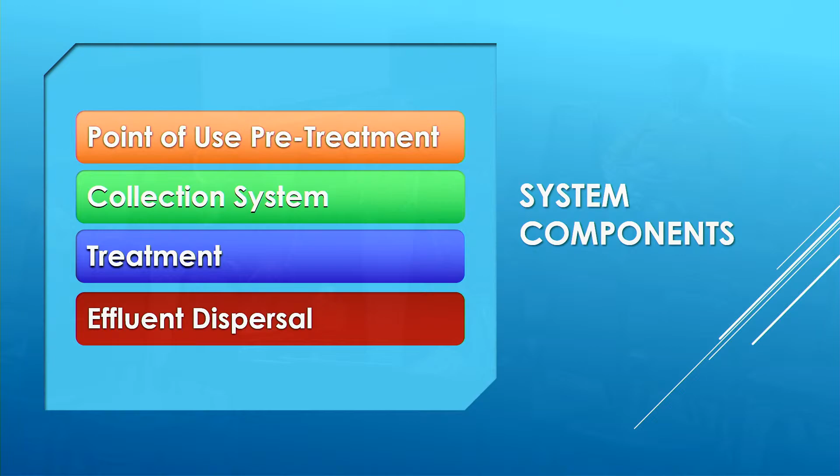So there are basically 4 system components, and the first 2 are very brief. They're very simple. This whole system is very simple. The first is the point of use pre-treatment. Then there's a collection system. Then there's the treatment, which is the biggest part of it. And the next to the largest is the effluent dispersal, which actually continues to work on the treated effluent.

Just a quick system overview. There's the point of use at the top, and I've color coded these - you'll see orange for those that are Tennessee fans. The point of use is where there's a house or a business, and there's usually some pre-treatment that goes on there in the form of a septic tank, or maybe a grease trap added if it's a business that uses grease.

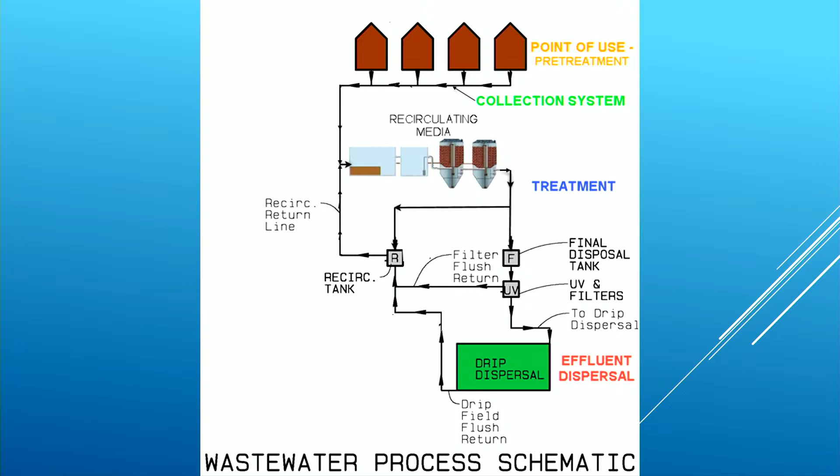And then there's the collection lines, which are usually a force main, but they can be a gravity line. And then there's the treatment, which is a recirculating media plant. And then the effluent dispersal, which is where the effluent goes down into the ground by way of drip tubes.

Using the NRCS Web Soil Survey, we evaluate the suitable soils that may be located on the property and quantify the usable area. We then balance the achievable lot yield with the required soils areas and overall treatment footprint. This process often involves some trial and error. The projected lot yield ultimately determines whether or not the development is economically feasible. When we are considering property acquisition and infrastructure cost, essentially it's a go, no go.

Sometimes the preliminary soils evaluation is taken a step further by getting soil scientists out on the property if it's questionable with the soils map. Those soils maps were developed for farming practices, so sometimes we want more assurance, or the developer requests it, and we do a preliminary walk through checking soils to make sure the NRCS soils maps are somewhere close. If the project is determined to be a go, a registered soil scientist performs a detailed soil mapping in accordance with TDEC's requirements.

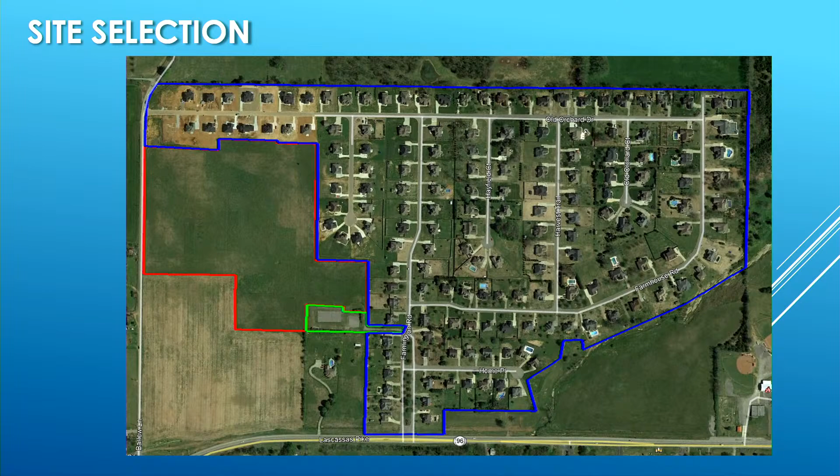So at the point of use, for a residential subdivision, the design flow is 300 gallons per day per lot. The pretreatment is a septic tank with a pump. If it's a commercial, industrial, or institutional user, the design flow has to be determined by the type of use proposed, and the pretreatment would be a septic tank and a grease trap. The septic tank has a pump in it, whether it's in the residential or commercial areas.

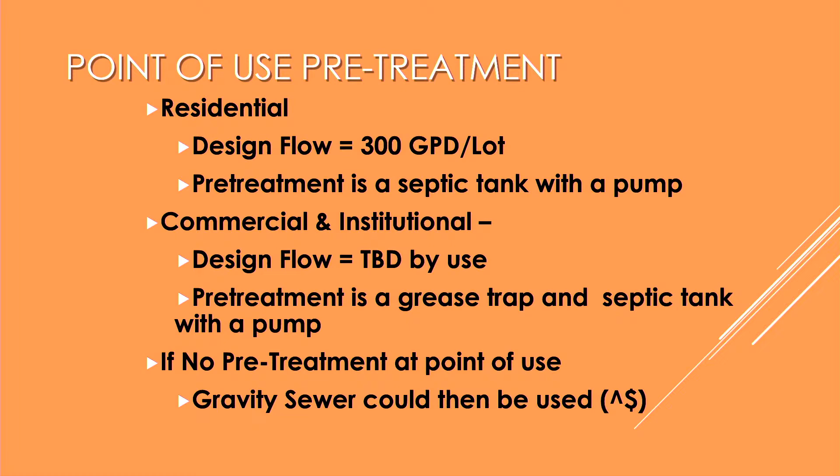If there's no pretreatment at the point of use, you'd have to use a gravity sewer to your treatment area, which is a lot more expensive. A force main is a lot less expensive. So with a septic tank, we're pumping the clarified wastewater into the collection system and on to the treatment area.

I got a slide out of order, and we'll come to it in just a minute with the wrong color, but I'm going to cover it right now anyway, and that is the pre-treatment. Let's see, I might be able to fast forward through there.

Oh, you're just getting where you can see? Okay.

And it's a watertight septic tank, which is very important—we don't need inflow from storm drainage or anything like that to increase the amount of effluent we're treating. So we want to make sure these are watertight, and there are a lot of companies that make those, so that's not an issue. We call them STEP systems because of the Septic Tank Effluent Pump—therefore STEP.

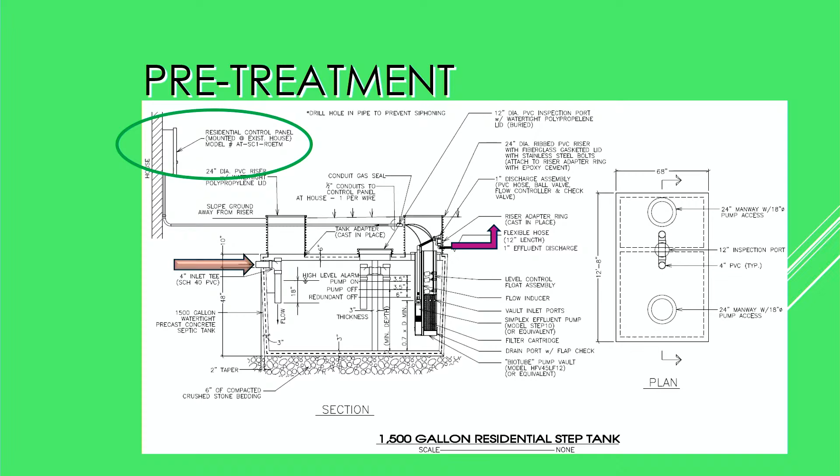I need to go back the other way now. Are there any questions about the point of use?

From a management perspective on those septic tanks, I know you mentioned there's an alarm that would go off if it lost power, meaning it would not be pumping. Is there technology now with Bluetooth capability so those can be monitored even from an off-site situation? Yeah, that's exactly what happens. Now, the utility company doesn't pay for the electricity, the user does. And that's also connected to let the utility company know when there's a problem, yes. Any other questions?

No aeration systems inside those tanks? No, sir, they're just a simple septic tank with a wall in it and a pump. So the solids stay in the tank, and the tank is owned by the utility company, with an easement around it for maintenance. If it were to have problems, you get in and service that. Those solids will eventually need to be pumped.

Yes, eventually, and if users are kind to their system, it could be a long time. I lived in a house when I first moved to Murfreesboro for 10 years, and I never had to have the tank pumped. So it's how kind you are to it that determines how long.

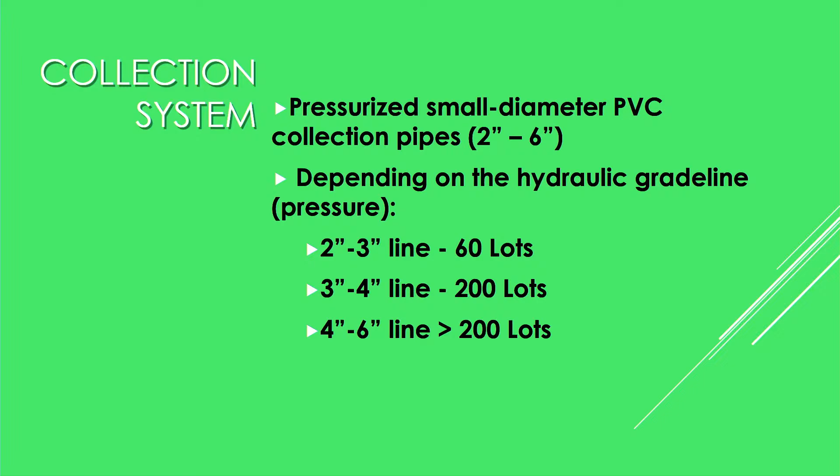And that is it on a collection system. They're very simple, not much to them. Any questions on a collection system?

Okay, now comes the meat of it, and that is the treatment plant design. We're going to talk about the design parameters. As mentioned earlier, the design flow is 300 gallons per day per house, and we have a recirculation rate that's typically 4 to 5 times through the system. One thing you don't want to do is run out of effluent and let your bugs die, so you keep some in there at all times to keep your bugs alive.

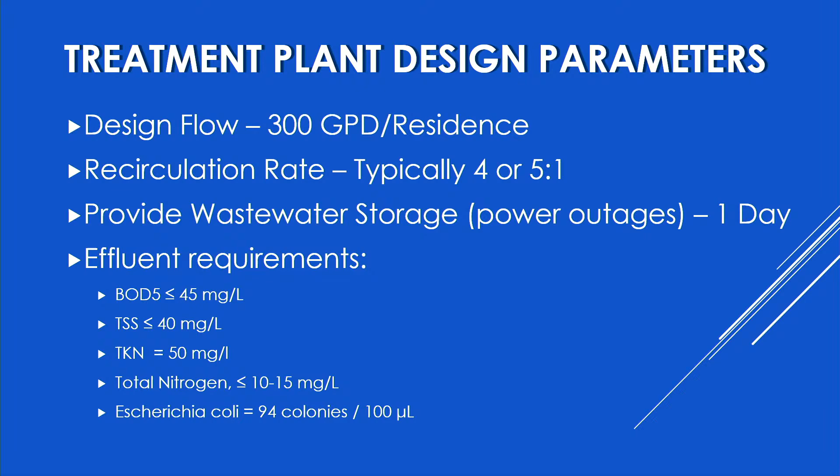We are required to provide storage in case of an outage. We have to provide one day's worth of storage. And we're going to talk a little bit about the treatment train.

Would you not have generator backup on this treatment facility? No, sir. In this day and age, we don't see as many outages as we did 20 years ago because of backfeed. But in that situation, it would have been in the septic tanks for days, not all at the treatment plant.

So what happens in 10 days on that septic tank side? Well, it's on the homeowner. I don't know, do you have any comments on that, Matt?

The concrete vaults are 1,800 gallon vaults. We say they're 1,500 gallons, but they're actually 1,800 because you've got some additional head on top. So right there you've got 5 to 6 days worth of storage, and then the piping system itself has storage capacity, and then the treatment facility—if we're doing, and I'm arbitrarily picking a number, 30,000 gallons of flow a day—we have to have 30,000 gallons worth of storage at the treatment facility.

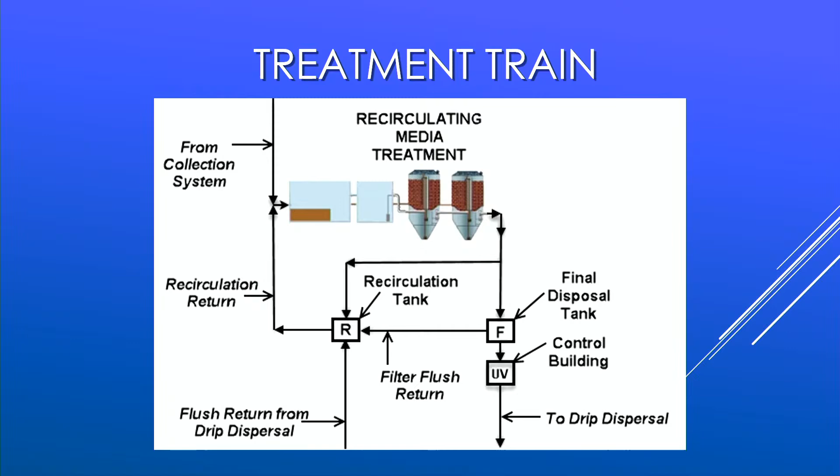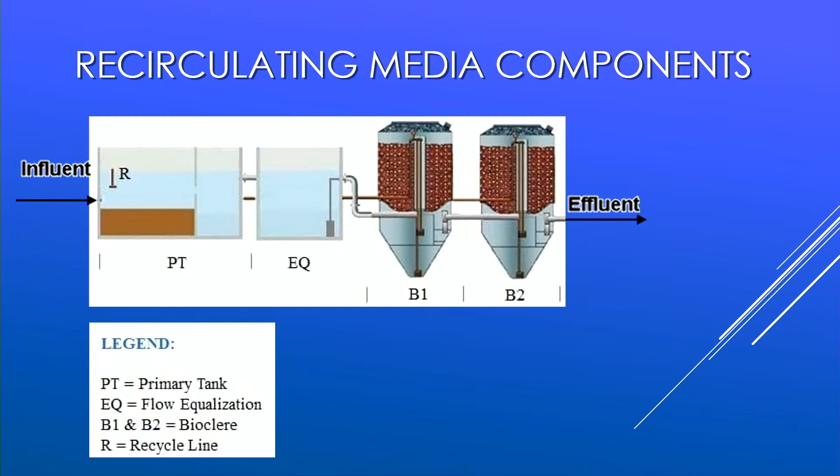The BioClere wastewater treatment technology is designed for a service life, typically around 50 years for the main structure. The system is built using durable materials like fiberglass and PVC. The BioClere units, our systems, are considered advanced, high-performance systems, and they're suitable for difficult sites or high-strength waste.

BioClere is often marketed as having a lower long-term operation and maintenance cost due to its design.

Each BioClere unit uses about 750 kilowatt hours per month. What you see there are two of them, and then the equalization uses about 250 kilowatt hours per month. Therefore, each train will use about 1,750 kilowatt hours per month. If you assumed 10 cents per kilowatt hour, that's about $175 per train per month. Typically, BioClere uses about a third of the energy of conventional systems that use blowers similar to activated sludge units.

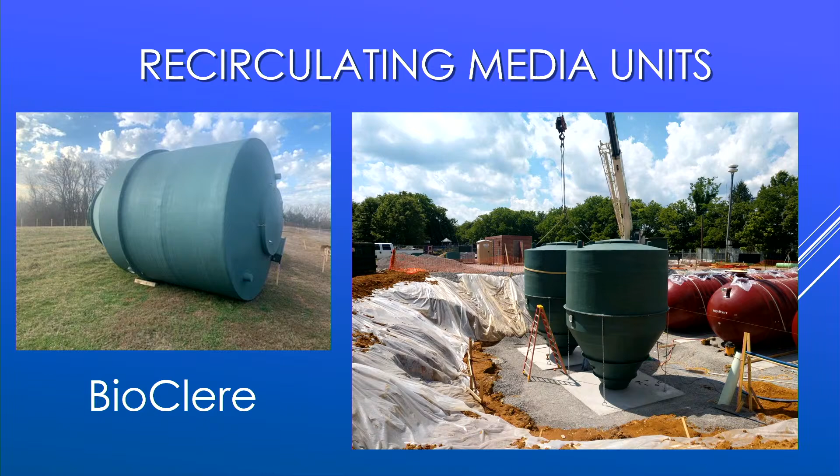There are several BioClere systems in Tennessee. We at Site Engineering Consultants have designed several in Murfreesboro, Thompson Station, Fairview, Memphis, and East Tennessee. They're used all over. I couldn't find an exhaustive list of them, but they're used quite a bit in Tennessee.

I mentioned the final disposal tank, and it's a concrete tank. Doesn't have to be, but that's our preference. There are various sizes depending on the flow that you're going to have.

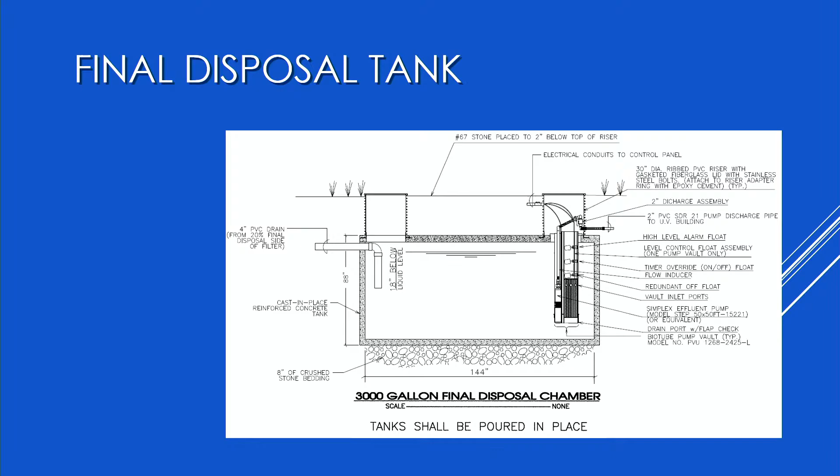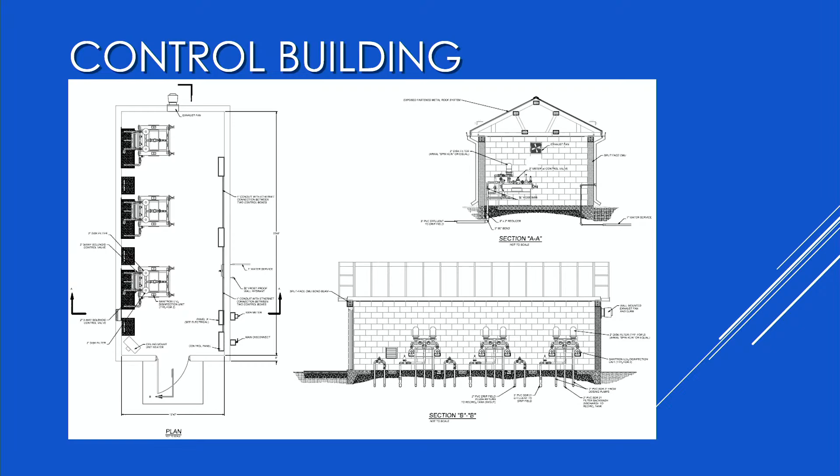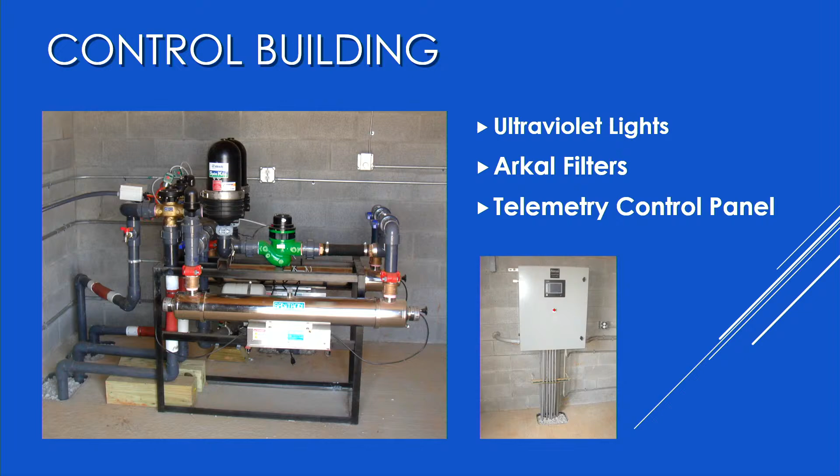Are there different sizes of them? That one right there - can it handle 100 houses? Yes, sir. There's a lot of different configurations, and you size them based on the flow. Yes, thank you for the question.

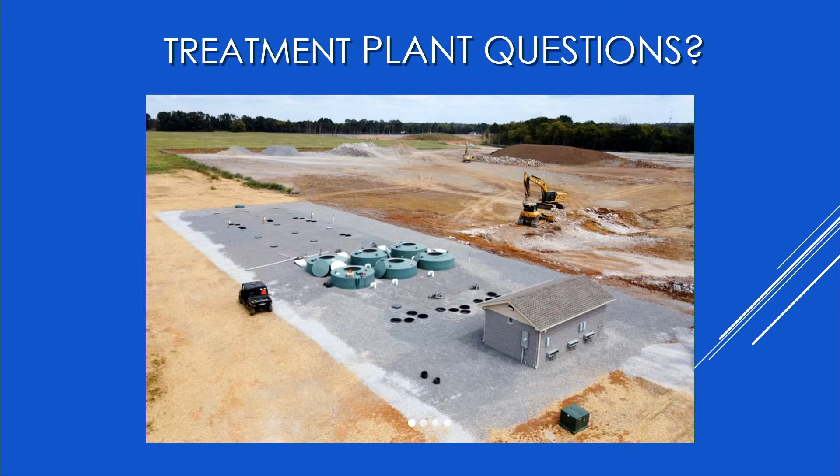What is the longevity of the UV lights? I'll let Matt talk about the UV light, because he's the one that handles the maintenance. The UV lights generally have a 3-year lifespan to them. We have had some that get electrical surge, and we'll have to go replace them. But generally, it's about a 3-year lifespan.

Any other questions on the treatment? Any particular configurations you have for the drip field, or any information about the drip field you could share with us? Yes, sir, I'll go into that right now. We call it land application or drip dispersal. The design flow, again, is 300 gallons per day per residence.

The land application rate - we'll discuss that in a minute. The soils mapping - we are required to do a high-intensity soils map with a 100-foot grid. In Williamson County, they require us to do a 50-foot grid. The usable soils are greater than or equal to 20 inches to the restrictive layer. We're required to do 2 test pits per soil type, and not every soil is good.

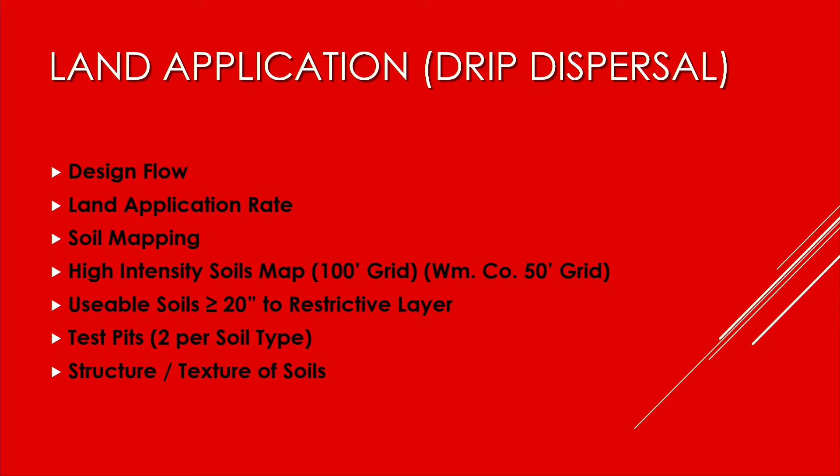The zones are controlled and monitored by telemetry at the control panel in the control room. The land application area requires soil mapping.

The land application flow rate - there's a flow rate, and we have to consider the soils and their ability to accept that. Some soils can take a higher flow rate than others. I'll just make a simple statement on that.

We use bioline drip lines with drip emitters, and those are spaced every 2 feet. Each emitter allows about 0.61 gallons per hour flow rate. So it's not flooding out of there, it's just a slow drip.

The state requires testing as effluent leaves the property, but it's easier to test at the filter building rather than catching water through soil - you don't know where it's going to migrate through the soil. So we test it in the control room, before it goes into the drip tubes.

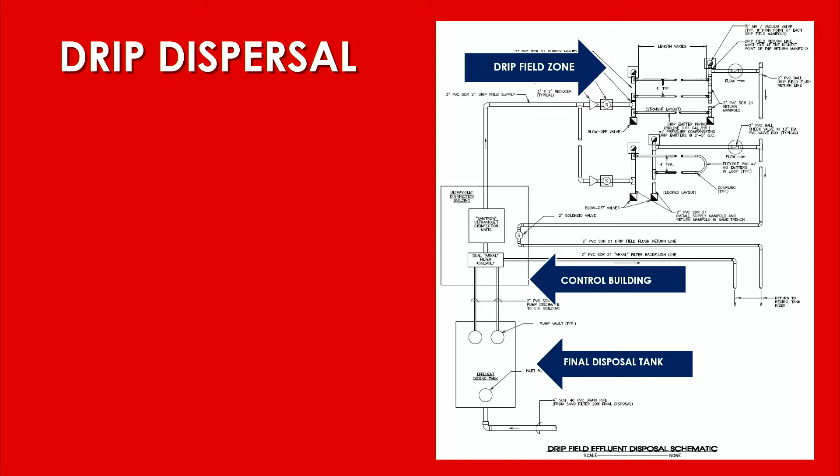Out in the drip field, the tubes are buried 7 to 8 inches below the surface, and the schematic shows the final disposal tank, the control building with the UV light and Arkal filter and the telemetry, and then the drip field zones, which I'll talk about now.

There's the drip tube - it's about as big as my little finger. You can see that drip emitter in a cutaway in the center top photo, and to the left you see that little hole - that's where the effluent drips out of the tube. These drip tubes are shown to be 8 inches under the surface.

Typically the drip tube is spaced at 2 foot, 4 foot, or 5 feet. There's no effect on the drip field size. We've used 5-foot spacings forever and haven't had an issue, unless somebody has done something to the soils to make them not usable, or after they were mapped, somebody altered the soils - but otherwise we've had no problems with a 5-foot spacing.

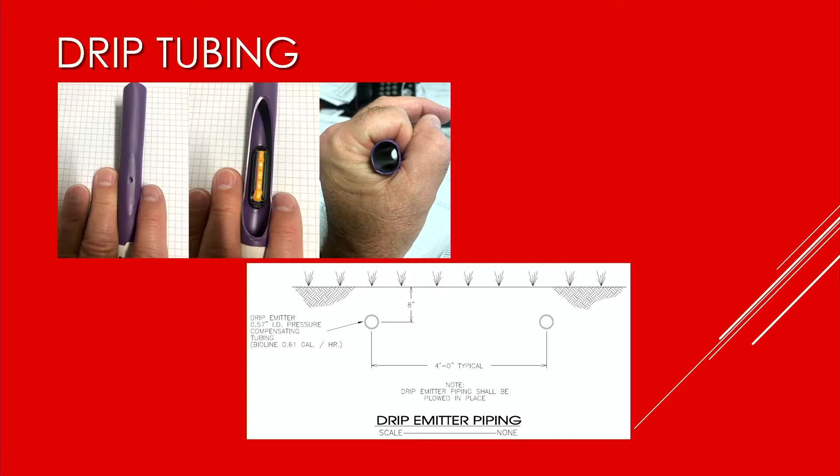The maximum length of a half-inch drip tube - we try to keep that at 400 feet, plus or minus, because of pressure losses if you go much farther. Typically you should have a maximum of 16 to 18 drip tubes per zone.

This shows a subdivision with drip fields in there. I had a picture of it without overlays, but what you see in green are the drip tubes themselves. We draw each one of those, and they're spaced at 5 feet apart.

The gray lines you see are the mapped soils from a soil scientist, and we determine where there are good soils and soils that aren't usable. Where it goes through soils that aren't usable, you have to put a tight line through there so there's no dripping - no effluent released through those areas.

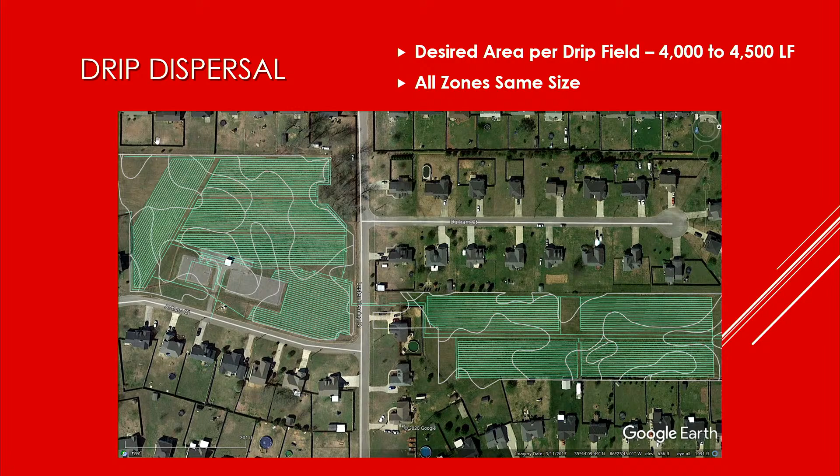Again, we fence those areas to keep people off of them from destroying it. You wouldn't want someone out there in a four-wheeler spinning their tires and digging up a drip tube.

How do you control the foliage that's growing out there? I'll get to that in just a minute. Thank you for the question.

So for the land application drip dispersal, we have to look at the required or allowable loading rates on those soils. A soil scientist determines those, and TDEC and other authorities have their own acceptable loading rates, but detailed studies may dictate different rates than the maximum.

Our preference is to set the maximum loading rate, even though some soils may allow 0.25 gallons per day per square foot as TDEC allows. We don't like to go that high - we use 0.2 gallons per day per square foot for well-drained soils.

I noticed you used consolidated utility there - I noticed that you listed consolidated utility there at 0.15. Yes.

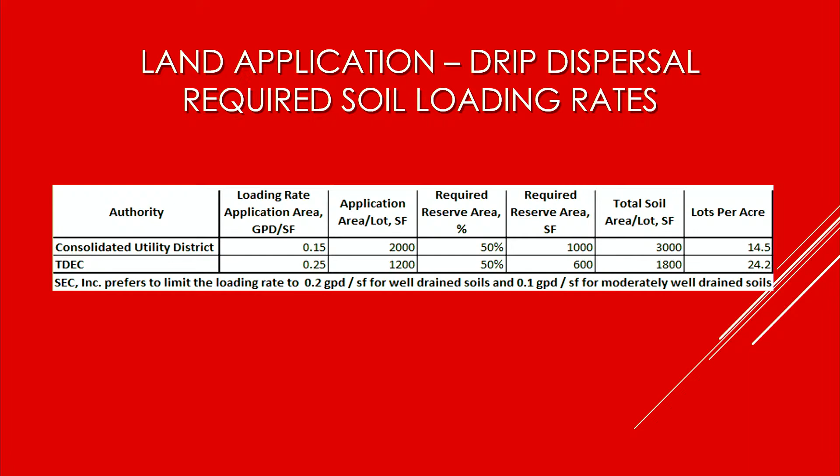So on that question, one of the biggest dilemmas we have is deciding what to recommend to the planning commission in terms of regulations. There's an obvious difference between TDEC, which one could classify as the minimum standard, and what Consolidated Utility District uses as standards for the systems they manage. What are your standards in that regard?

You mentioned .2. Yes, sir, that's your company's standard. Yes, we don't go more than .2 gallons per day per square foot.

Let me interject some real quick. On the loading rate, you have well-drained soils, and that's what this is talking about. Well-drained soils, TDEC's gonna let you have a .25, we go with a .2. Moderately well-drained soils, we're going to go with a .1. It's a very linear equation, so if you have a bunch of moderately well-drained soils, you're going to need twice as much soil as you would if you had well-drained soils. So the standard really is .2 for well-drained soils and .1 for moderately well-drained soils.

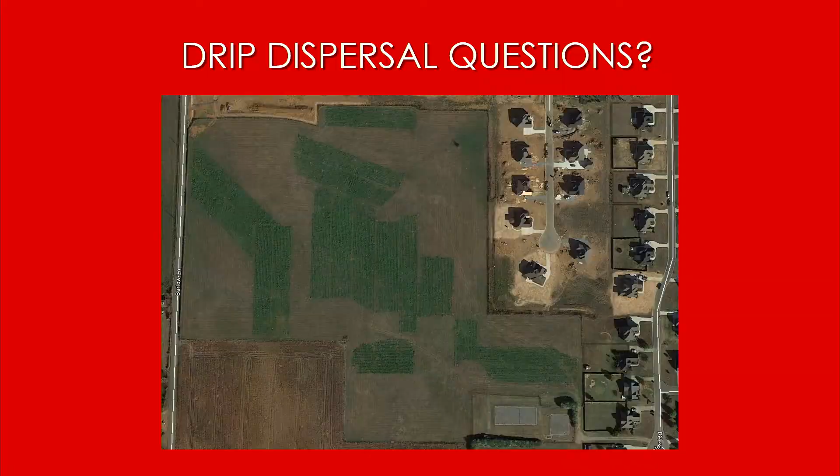Thank you, Mark. Again, I'm Matt Nix with Edge Wastewater. I do want to clarify one thing I said earlier. After you asked me the question, I texted operations, and they said that we're replacing the UV lights. 50% of them get replaced within 12 to 15 months, and the other 50% are replaced between 24 and 36 months. A lot of it depends on usage.

So how do you know when it's time to replace one? They go out and look at the UV light itself, the bulb. Some of them we can clean off, some you can't. So you have periodic inspections? Oh yes, sir. How often do you inspect? Twice a month, every 14 days. And then we have the rest of it set up on telemetry so we can monitor the system remotely.

Appreciate Mark's comments about the system and how it works. For you guys, at that point you decide you're going to go with the system. Then the question becomes, what do you do with it? How do you manage it? How do you operate it? Who operates it? There are several different models out there, and I'm happy to talk about any of them, or the bigger ones.

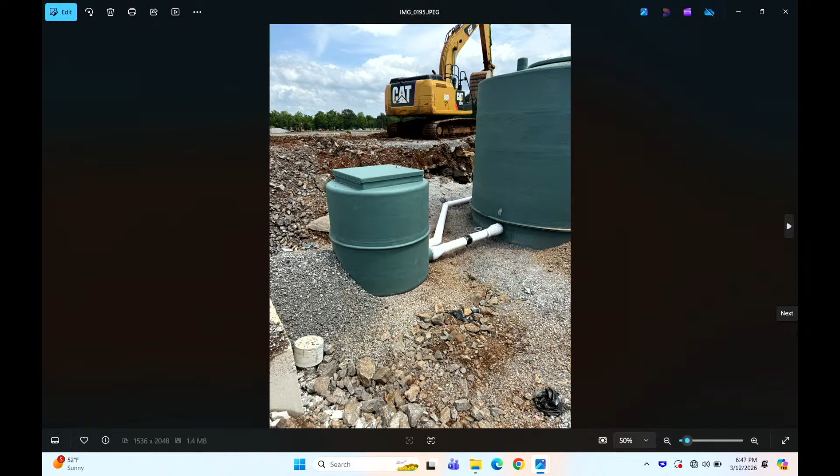This right here was the Uncle Nearest out on 231. These were 4 bioclears. I wanted you to see this because a while ago, all you saw was the top 2 or 3 feet of these bioclears, because that's all you see. But these right here are 22 feet deep, and there's blasting involved in pretty much all of these systems. We have to blast these holes, Rutherford County, Bedford County, you're not going to dig a hole 22 feet deep in this area. So normally, and in this case, water was kind of an issue, groundwater, so we actually pulled the tanks up out of the ground a little higher, and I will show you what we did.

This was how the splitter hooks up to these units. Those 4 units actually worked in series in 2 pairs. There was one bioclear that was higher than the next, and they worked in series down to the dose tank, and I will kind of work through this. That's for a reason, and once again that is an engineering reason, I don't dictate that.

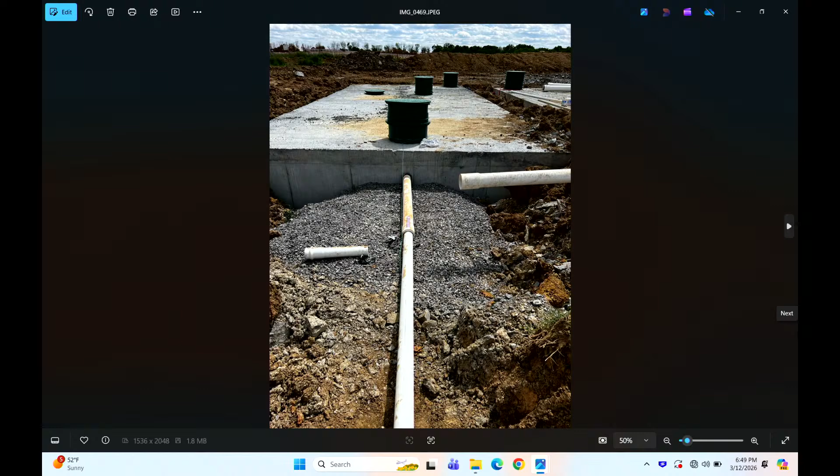This right here is the massive, it's a 25,000 gallon concrete tank that they used to catch, as a holding tank, that was pumped into the EQ tank, that pumped into the splitter down to the bioclears. It's kind of like he said, it's not a complicated system, it's just pretty massive if there's a lot to it. This is a commercial application and not a residential, but we are actually in the process of bidding one in Spring Hill that's going to have almost 800 houses, so it's a massive system.

And I will say that learning from technology, SEC is actually drawing the plans for these. They are starting, this will be the first one we will have ever done this on, but they are using drawdown drains and curtain drains around the drip line to make sure they keep all the excess water away from the zone area so that the dirt is only handling what's coming from the plant. So they're learning as they go, the technology is really catching up.

If we had no rules and regulations, how did that get approved in Bedford County? I'm sorry, if we had no rules or regulations, how did that get approved in Bedford County? It's a commercial application, I believe that falls under TDEC, but I'm not sure, that's a question for somebody that knows.

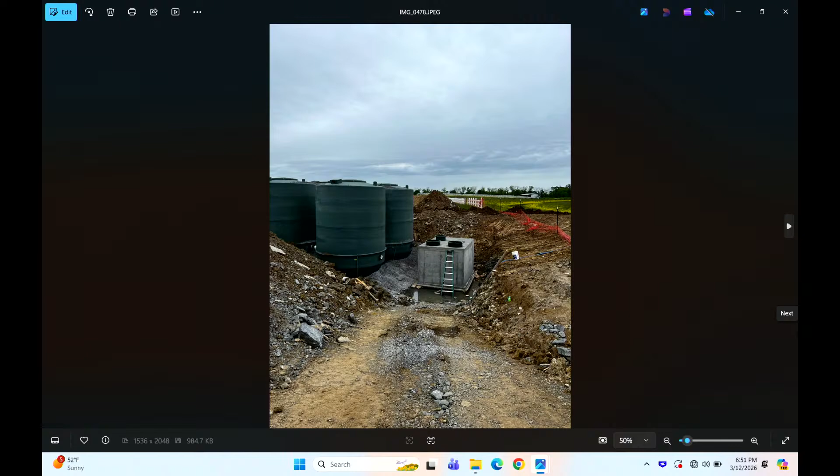This is the dose tank, the bioclears hooked up to the dose tank. We use mechanical joint fittings in this instance to make sure it's more durable.

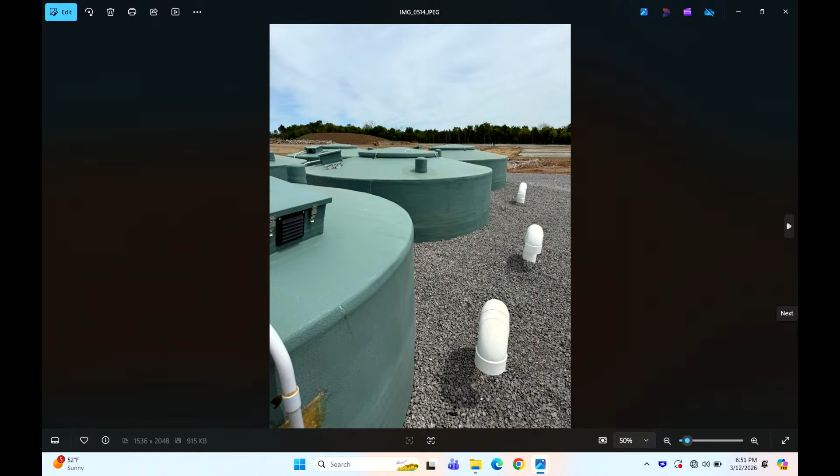These pictures are not in order, I apologize for that. This is actually Greystone, the picture Mr. Lee showed you earlier, the aerial view of the big system with the 6 tanks and the big gravel area—that's these right here. We actually installed this system, and they did an aerial view before the fencing and any of it was finished.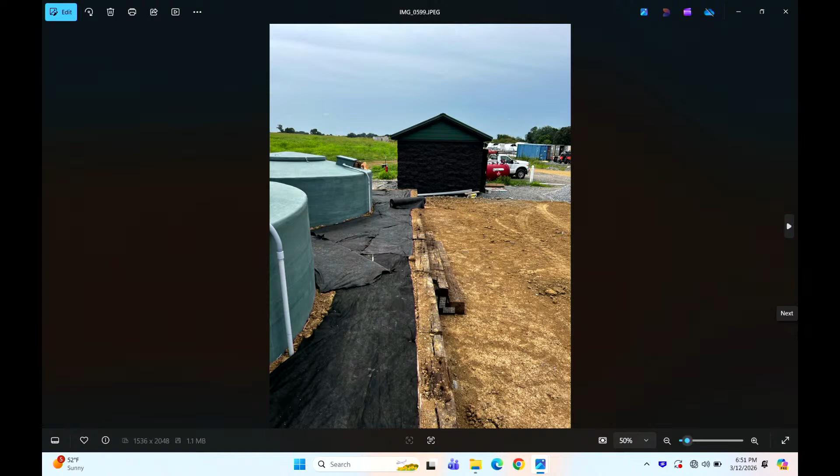This is back to Uncle Nearest. As you can see, we pulled the bioclears out of the ground some. Aqua Point doesn't want you to go higher than 3 foot out of the ground because of a maintenance issue. Those little green boxes on top have electrical connections that need to be accessed—you see the big access panel on top. So for maintenance, they don't want you to bring it out more than 3 foot. Obviously in Bedford County or Rutherford County, you want to bring it up as high as possible to get out of the rock.

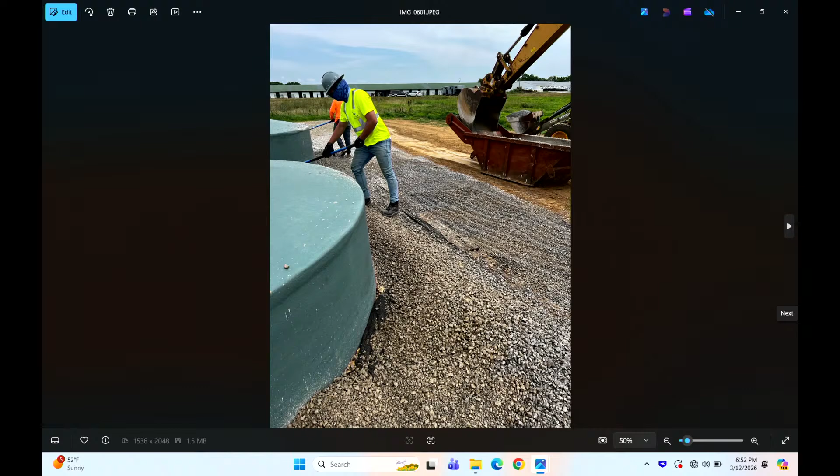So what we did is use cross ties to border these and build up around them, and I'll show you this. We gravelled everything—once again, we don't leave any dirt or grass, we gravel everything. That's a long way picture of what it looks like now, and that's a bit more close up of the control building and the bioclears. Like I said, we box them in with the cross ties just to make it look better and more accessible for maintenance.

Coming from more of a maintenance side and an installer side, I look out for the guys that have to maintain these things. I don't want to put anybody in a bind like that. So if it costs us a little more money, we're going to do what's right.

This is just more pictures of the gravelled area. They did not make us fence in this area. The drip line out at Uncle Nearest isn't fenced in because it has UV light filtration in the control building—if you have UV filtration, you don't have to fence in the drip line. I would encourage you to though. Before we got done with this, they were riding horses out on the drip line area, so we had a big ordeal trying to keep them off of it.

There's a little better picture of us boxing those in and graveling everything. We even put some steps there for maintenance purposes.

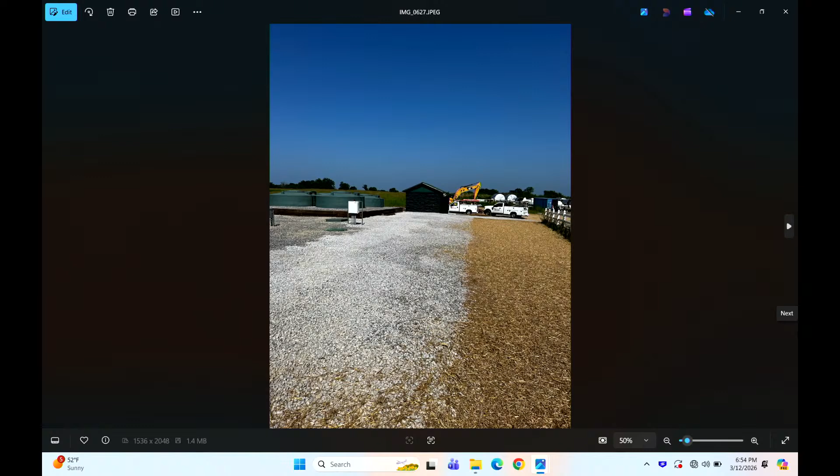When you have to get into the top of the tank to replace something, how many feet of clearance do you need above that? If you open that big round circle on top of the BioClear, the media is within arm's length, probably 18 inches.

Have you seen any of these where they actually put a roof over it to protect it from UV, to keep from breaking down the tanks? I mean, you could, because obviously fiberglass, PVC, anything like that is going to break down with sunlight over time. But Aquapoint can probably attest they have these in the ground for probably 30 years and haven't had a bit of trouble out of the hull. So I don't know, if you wanted it to last 100 years, then yes, you might do that, but that would be a question for them.

Any other questions for them?

I don't really know exactly what to tell you other than show you kind of what we use to install these, some pictures of us actually installing. I was trying to get to... here we go.

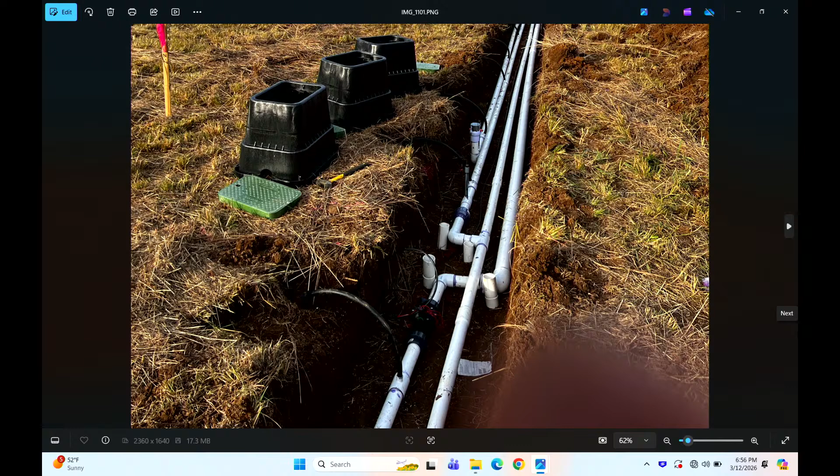This is the drip line he was referring to. Off to the left where those boxes are sitting is where the Netafim drip line pipe are running. If you see the little black pipe coming out of the ground going down to the white PVC, that's the black tubing we use to connect the drip line to the actual manifolds.

The manifold closest to the ditch is our supply. We always put them first, that way it's more uniform. Everybody knows if they dig it up, this line is the supply manifold. This is a return manifold.

The 3-inch pipe is the actual supply itself. That's coming from the building, coming out to the drip line. The little black pipe at the bottom, there's a black blob right there - that is a solenoid.

What happens is when the building kicks on, water will go - effluent, yes sir, right there. Effluent will go through that 3-inch pipe to every zone, but the computer will tell it which zones to cut on. So you're only dosing certain areas of that field at a time.

You're not dosing the complete field. So we basically construct all this. You have blow-offs and check valves to make sure nothing backs up into the back of that system. This system actually was what he was talking about a while ago. The maximum length is 400 feet.

These lines were less than 200 feet, so we looped them on the other end. So your supply came in right here, went down, came back, and then went into the return. So you have different configurations based on how your drip line lays out, if that makes sense. But it's a real simple system - water comes on from the building, comes out to the system, computer tells it which one to cut on, and it's all simple PVC piping.

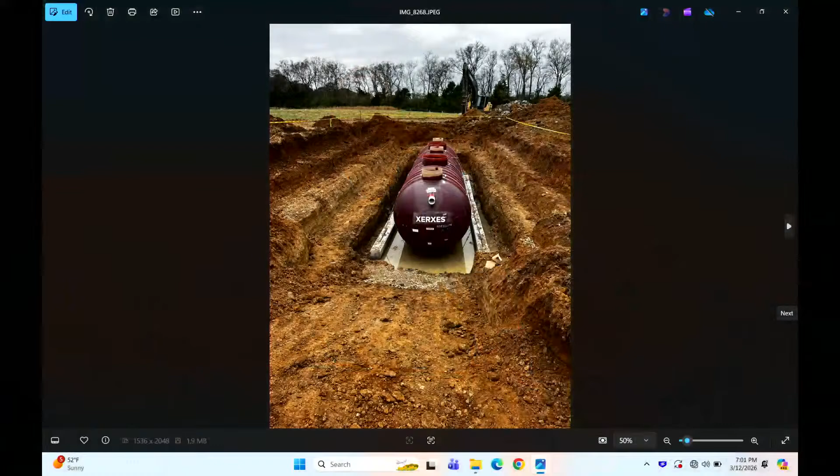This right here is Xerxes tank that he was talking about earlier. This was College Grove. This is actually a combination tank of the EQ tank and the recirc tank. I know that doesn't mean anything to you guys, but these are 2 tanks in one because this was a small system.

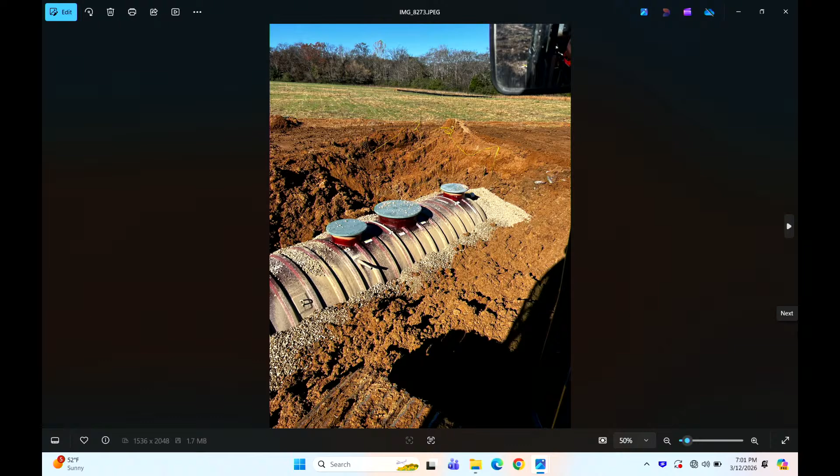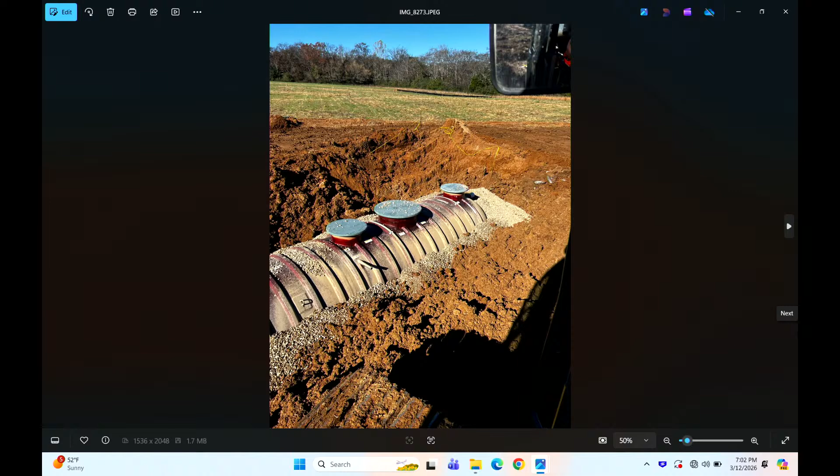This is covered up. Everything is gravelled. We don't want any dirt touching anything other than the gravel we put around the system. We gravel all the way to the bottom of all the piping. Some people found out the hard way backfilling with dirt. You don't want to do that because dirt settles and these pipes were snapping off. So we gravel everything up under it, and actually we even gravel more because it's just cheap insurance.

What do you use, half-inch chips? Yes, sir. That or 3/4, 57s.

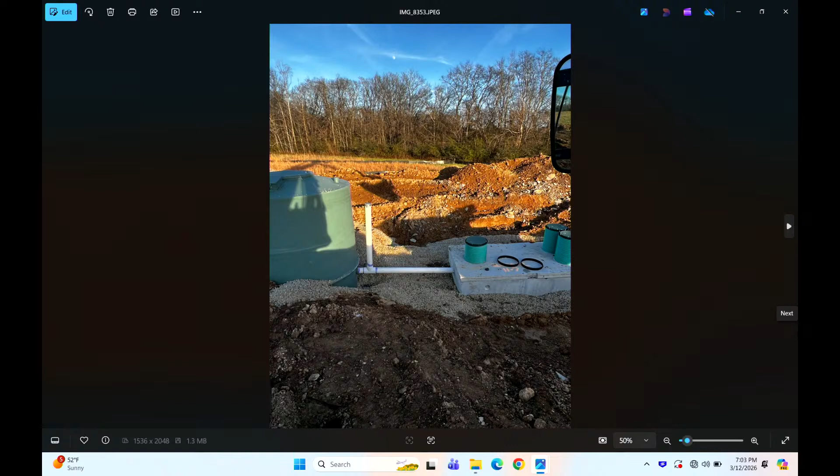This is just the pipe hookups, PVC from the EQ dose tank to the BioClear. There's one going to the dose tank. If you see that pipe sticking up, these systems are always vented on the outside so that any gases can get out, just to make sure you don't have any issues with that.

That right there is the line going back to the recirc tank. The BioClear doing its job just like any filter, the sand filter, EcoPod, any of them, they're throwing water up on top and it leaches down through the filtration, and that's how you filter the water. Then that water goes out to the dose tank and gets pumped to the drip line. Anything that doesn't make it out to the drip line gets pumped back to the recirc tank, and the filtration process starts all over again. So it's just extra filtering.

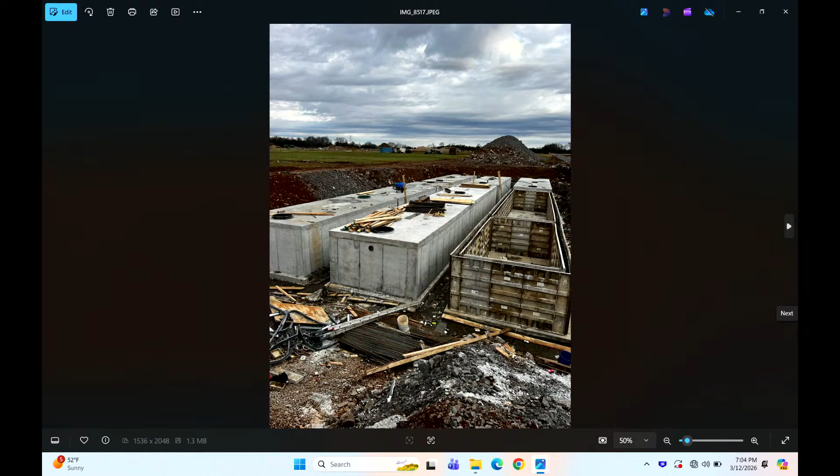This right here, the system he showed you at Greystone in the aerial view, these were the tanks that we built. We used the concrete tanks and not the Xerxes tanks. The 3 that are farthest away are 15,000 gallon tanks, and they are the EQ tanks. These 3 up close are 25,000 gallon recirc tanks.

I wanted to show you this one. That kind of shows how these tanks are built with the forms up. The last one wasn't poured, and they are 8 to 10 inches thick, depending on the rebar specification.

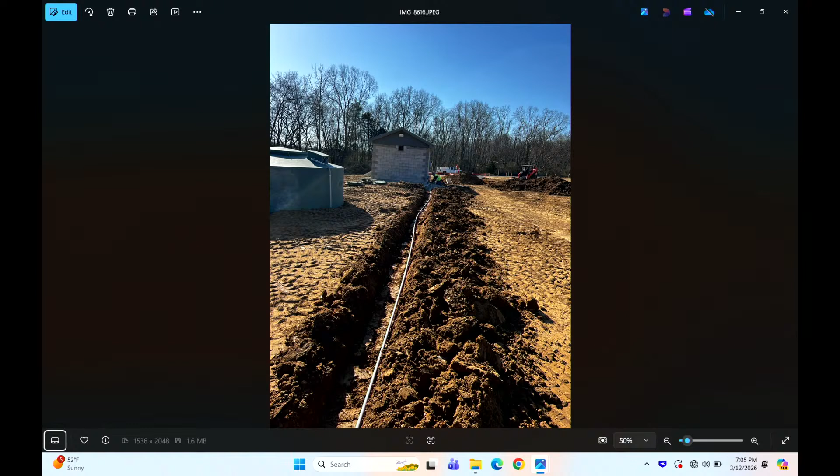So, any questions anybody have on anything? It's kind of a boring process. The best thing I could do instead of telling you is taking you out there and showing you a system. So, I'd be happy to do that anytime you want.